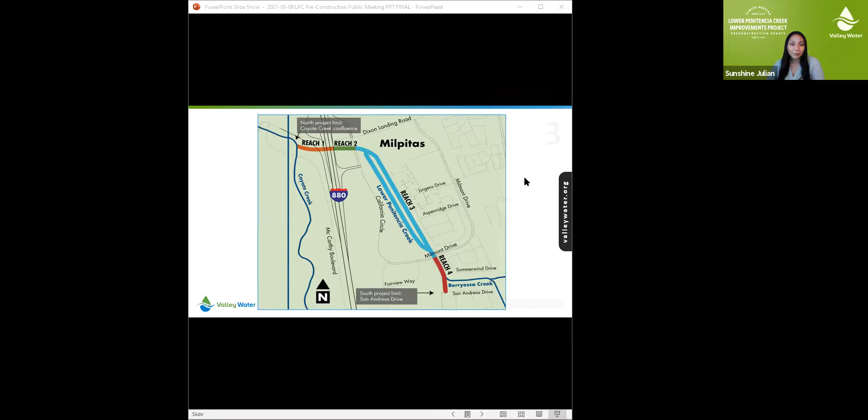As mentioned in the last slide, completion of the lower and upper Berryessa Creek projects will increase the 1% flow in the Berryessa lower Penitencia Creek system. In its current condition, lower Penitencia Creek cannot carry this increased flow, so additional improvements are required along lower Penitencia Creek to increase its capacity to convey the increased 1% flow.

The objectives of this project are to convey the lower Berryessa Creek 1% design flow, to meet required water surface elevations at the Coyote Creek and Berryessa Creek confluences, minimize the need for seasonal removal of sediment and non-woody vegetation, maintain existing FEMA accreditation, and ensure improvements meet FEMA certification requirements.

There have been presentations provided to the public since 2012 on this project, including the Environmental Impact Report Scoping Meeting, Alternatives Meeting, Project Update Meetings, and most recently the City of Milpitas Council meeting last month.

Let me briefly go through the project elements by reach, using the color-coded sections I mentioned earlier. Reach 1 is from Coyote Creek to 880. The cross sections shown here and in the upcoming slides are looking downstream, in the middle of the creek, and in the direction of water flow, for reference.

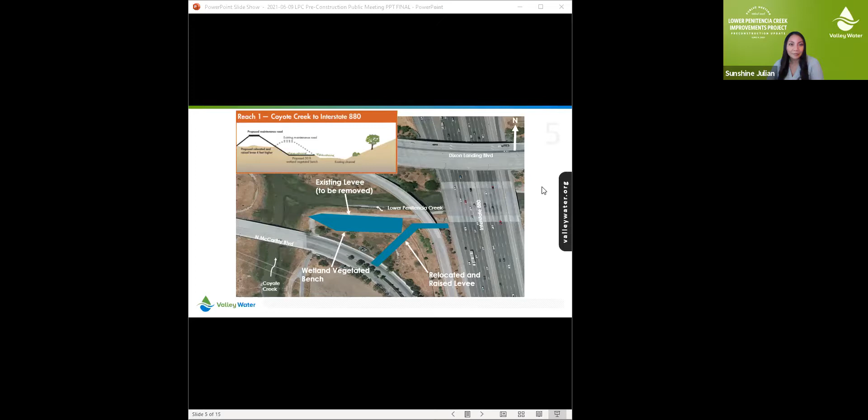This is reach 2, from 880 to California Circle. This reach includes a new flood wall on the south bank levee.

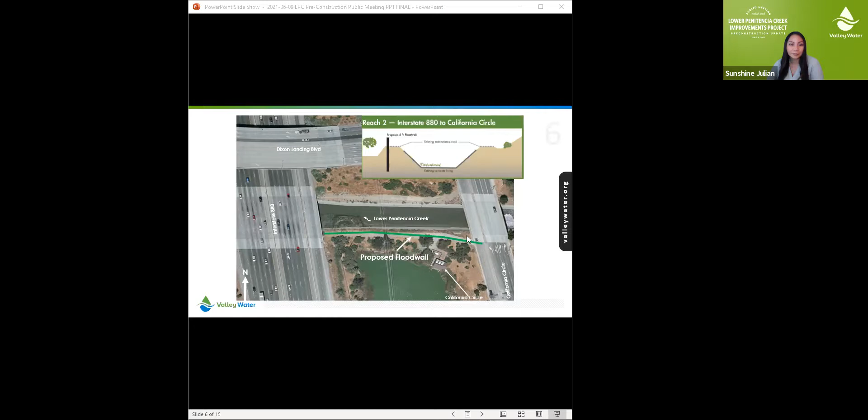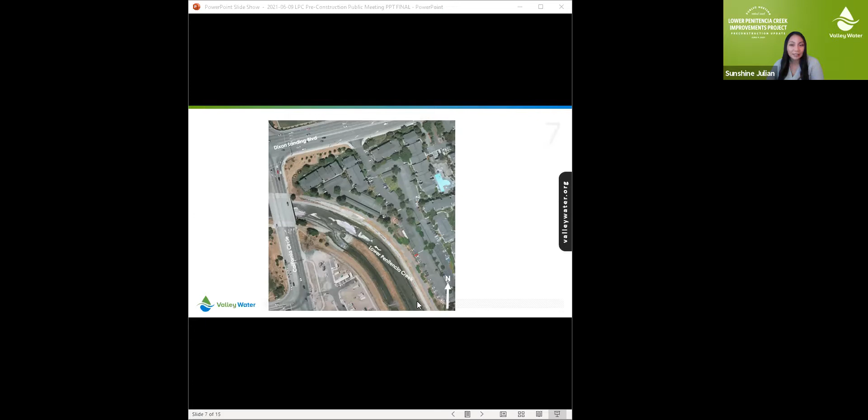This is a section of reach 3, from California Circle to approximately Cascadita Terrace area, and includes a new flood wall on both leveed banks.

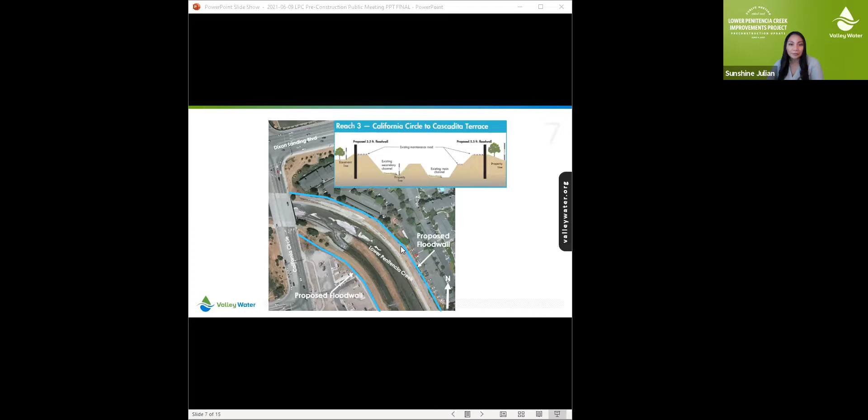Continuing reach 3, from approximately Cascadita Terrace to Milmont Drive, will also include new flood walls on both leveed banks.

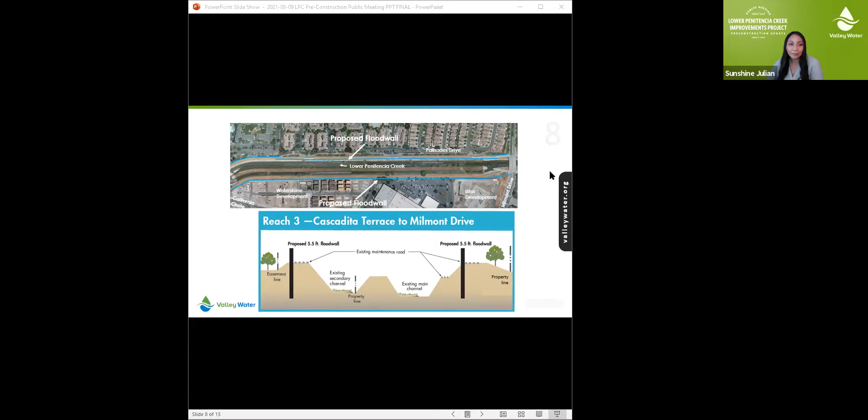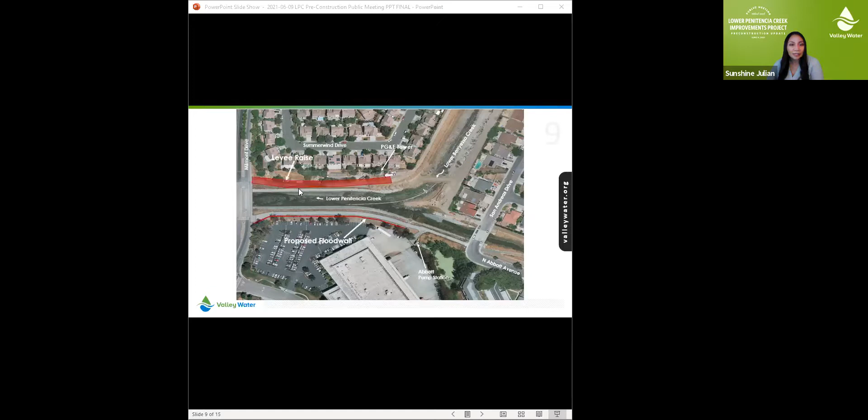The last section is from Milmont Drive to San Andreas Drive. Work in this reach includes raising the east levee here, as well as installing a new flood wall on the west bank.

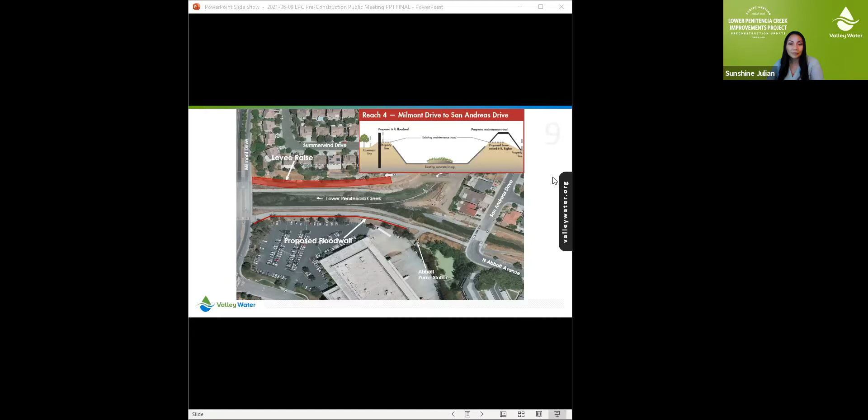So what can you expect during construction? You'll see construction equipment such as drill rigs. The contractor will use a non-vibratory method for installing the sheet pile flood walls. There's also hauling and stockpiling of materials, best management practices such as dust control measures, traffic control and trail closures, monitoring such as biological, vibration, and noise monitoring, and site security such as fencing.

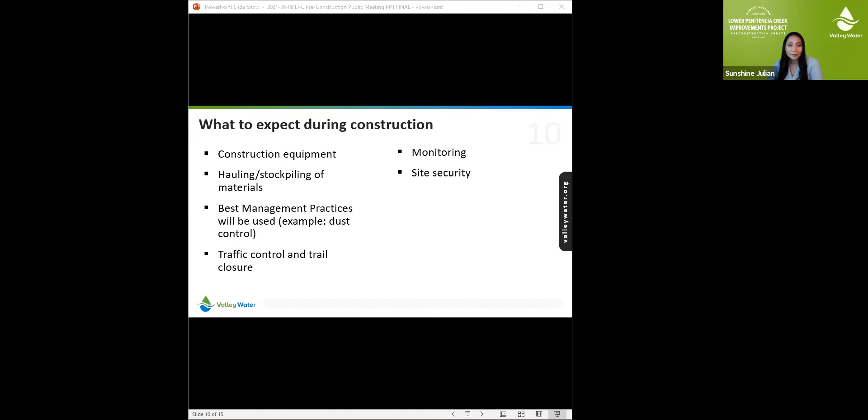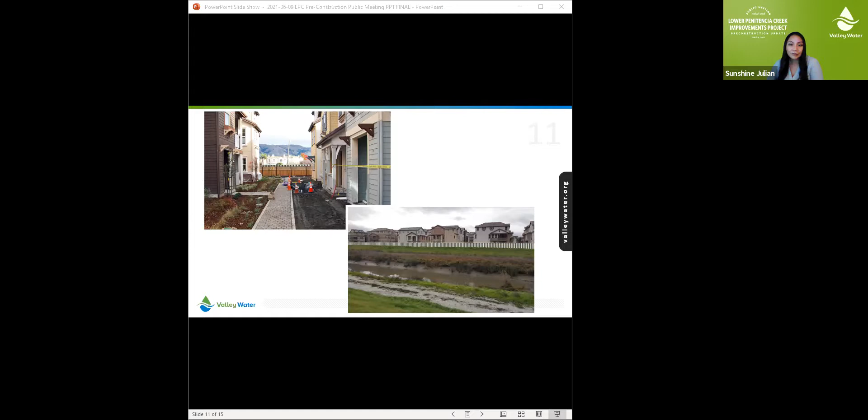We advertised the project for construction on March 9th this year. The construction contract was awarded at the board meeting on May 25th last month to Gordon N. Ball Incorporated. Today is the pre-construction public meeting; mailers and Nextdoor posts were sent out prior to this meeting, and we'll continue providing communication and updates via mailers or Nextdoor posts. Project signage will also be installed. Construction will start this summer through the end of next year, 2022, followed by a 3-year plant establishment period.

In-channel work, or work inside the channel, will take place through the summer until October 15th, and work will continue outside of the channel after October 15th.

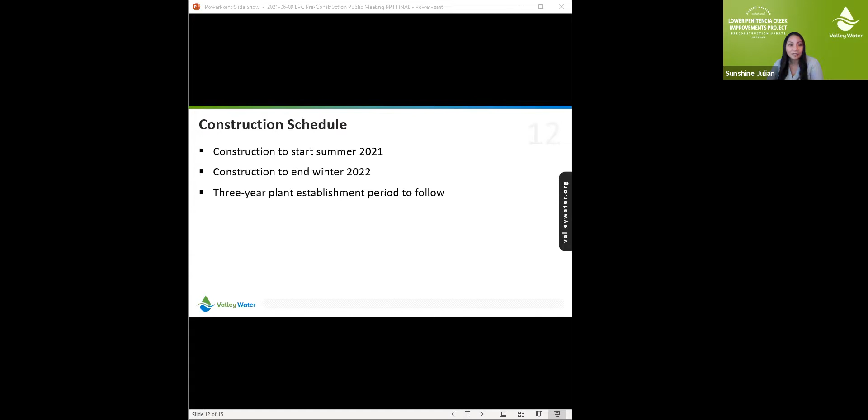Who to contact? For any emergencies, always call 911. The contractor again is Gordon N. Ball Incorporated. For any questions about this project, please contact Jose Villarreal, our neighborhood liaison, or use Access Valley Water. You can also sign up to receive project updates, and here is the link and path to the project webpage.

With that, I just wanted to provide an update on the Lower Penitencia Creek Improvements Project. Bill Sanchez, the project manager, will join in, and we're open for any questions. Thank you.

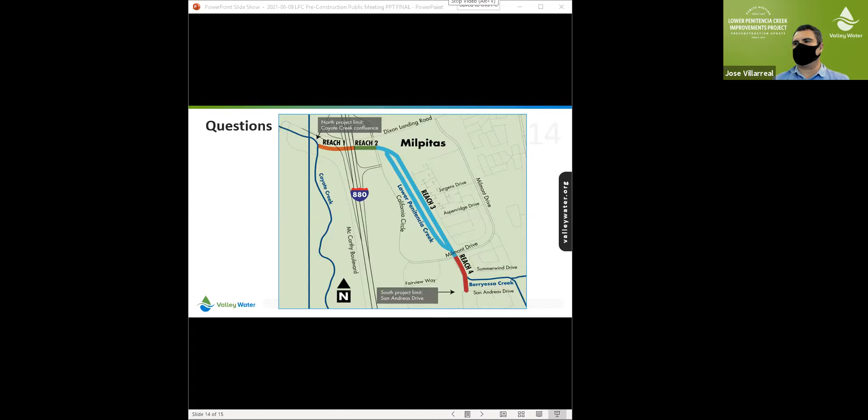So Bill, can you tell us why we don't do work inside the channel during this time period? What's going on in there that we can't be in there? Our permits are very clear. There's a sensitive habitat that we have to avoid and mitigate. There are wetland areas that we just can't work beyond. Our limit within the channel wetted area is from June 15th through October 15th. So we won't be able to work within the channel outside that time period.

We got a comment regarding graffiti on the overpass near Abbott Avenue. We'll get that to the City of Milpitas to get that addressed. But any questions that you might have, please put them into the Q&A box so that we can capture them and provide a response.

You mentioned in the presentation that there's going to be plants going in. Can you tell us a little bit about that, and how does that benefit the project, the wildlife that's there, as well as the overall community? Sure. So this project provides long-term sustainable benefits for the community. Not only public safety by reducing flood risk, but it also enhances wildlife habitat. For the wetland bench component in Reach 1, that will create higher quality habitats for a variety of different species. By doing the mitigation necessary for the project, we'll provide for that habitat and those species.